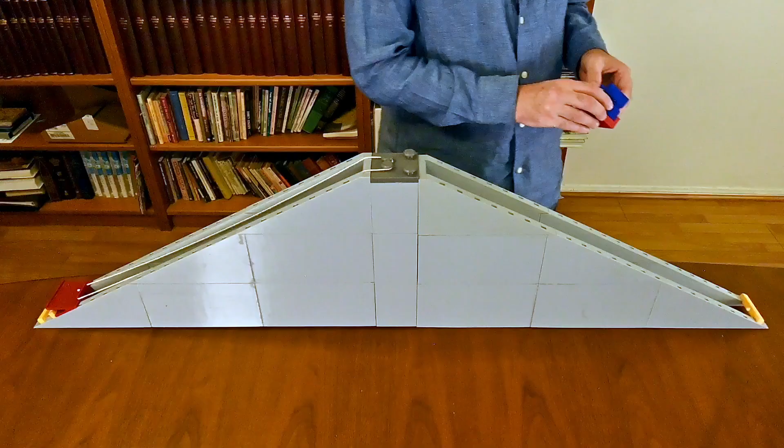This system would be in the Grand Gallery. It would slide up on the lowest part of the floor of the Grand Gallery. It would be hoisted up using manpower to lift it, and then you would have your regular size block to lift up to be placed in the pyramid.

Whether you consider the smaller granite blocks or the even smaller limestone blocks, this system would be lifted up and pulled down to lift this system, offload the system. They would lift the system back up, onload another one, and do it again.

Now, when you wanted to put extra weight on, say the 80-ton block, the huge block, you have a massive amount of weight to lift this time. This ain't gonna cut it. It's not enough counterweight, it's not gonna do it.

But if you add another counterweight, because there were three granite blocks found as plugging stones, you could lift that up, hook a loop, a pre-made loop that would tie these two together, and then you could do it again, and you could get three granite blocks. There may have been more blocks that were plugging stones made of limestone that were just broken apart and taken out of the ascending passage. If you guys know what I'm talking about, great.

But the thing is, if this was a reasonable size weight a group of humans could lift, you could keep pulling up blocks and attaching them to each other so they could do the lifting for one giant block. Then when you offload this block and need to reset it all, you would just untie these blocks. You would not have to offload the weight.

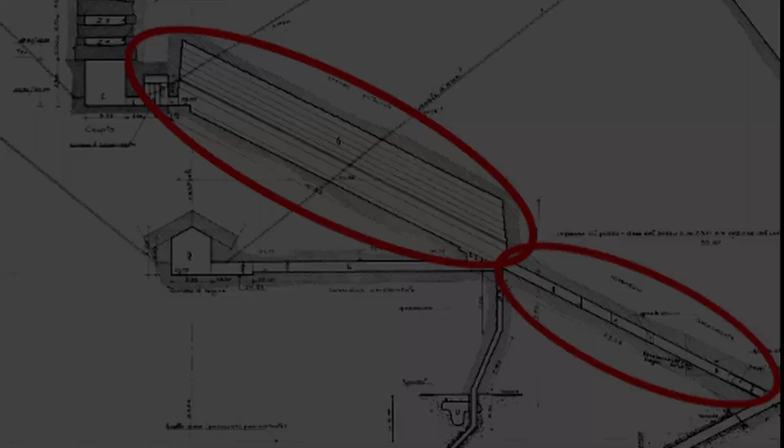And that's where a lot of men were probably standing with ropes, helping to pull and actuate this whole system. And that water would be either absorbed, or wasted, or whatever.

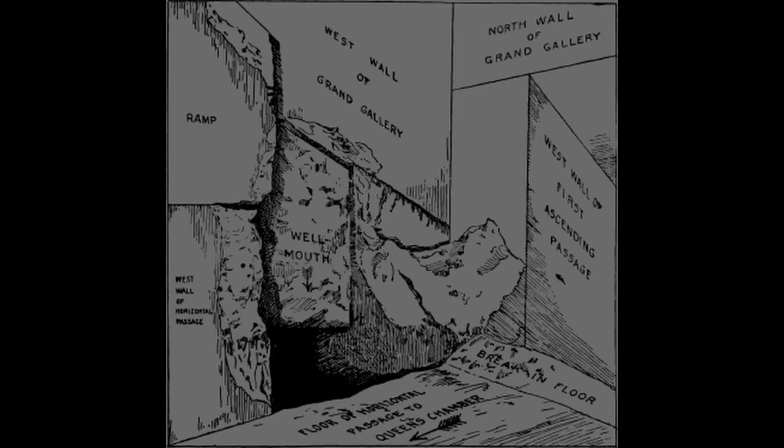But we know that right here at the very bottom of the Grand Gallery, there's what they call the well shaft that leads down to the grotto. History shows that when people rediscovered the pyramids and threw a rock down the well shaft, they heard a splash of water.

So this would be an area where the lubricating fluid could flow and keep the entire floor of the Grand Gallery lubricated, but they could recycle the water that went down the shaft and didn't keep going out of the Grand Gallery and out of the main entrance.

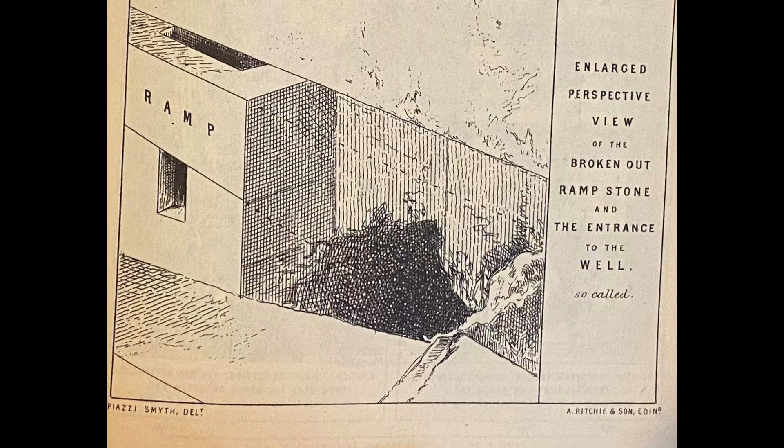There was even a lip on the edge of the bottom of the Grand Gallery that shows it probably directed the liquid into the well shaft, and that well shaft could be used to recycle if they sent buckets down, to bring that fluid back to the top. Okay, so that's basically another theory that I have about it.

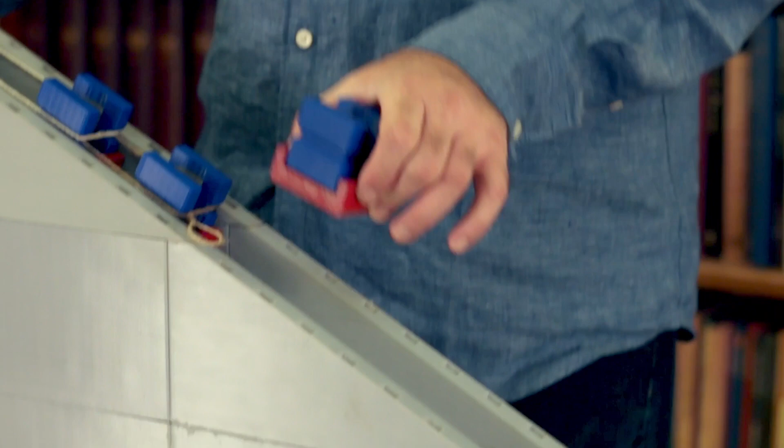The other thing I know is that this is a magic angle, 26.5 degrees. It's just the sweet spot between being easy to slip down and get started moving, and being so vertical that you can't stop it from moving. It always wants to slide. And it's not such a vertical angle that it would be hard for humans to lift it. They wouldn't have to lift it vertically.

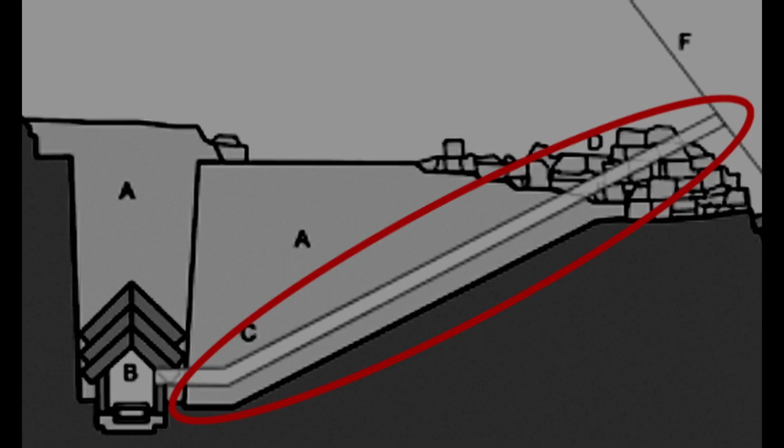The reason I bring that up is that this angle isn't just used for the Grand Gallery. With the exception of just a few, almost all the large pyramids had this exact angle, but we didn't find Grand Galleries with this exact angle going to their subterranean burial chambers. That subterranean burial chamber probably doubled as its own sliding counterweight system for building the pyramid on top of it, because it was at the exact same angle.

Another interesting thing was that when they got to the bottom of these descending passages in the pyramids, it got wide, which would be a perfect area to pull the blocks in and push them aside if you were trying to move stuff in and out of the pyramid, fix something, or anything, because these blocks were the width of the tunnel, so it wasn't easy to work around them. But all of the major pyramids have an area where the block could either be pushed aside or it got wider on both sides, and then a person could walk around and hook up these, connect weights, remove things, and do stuff like that.

So I believe that was the system. And then when they built some of the pyramid above them, they would build another counterweight system, and then they would have a series of blocks.

In addition to this, we also know that there is the great, I believe it's the Big Void. It's a large area that they think may have been a second Grand Gallery, one that was at a better angle and altitude to lift the final stones on top of the relieving chambers in the Great Pyramid.

But in any case, I believe that these systems were repeated, that there wasn't just one of these. This one was a special one for the Grand Galleries, but a similar system was used to build all the pyramids, and they could use this system to actually build on top of itself.

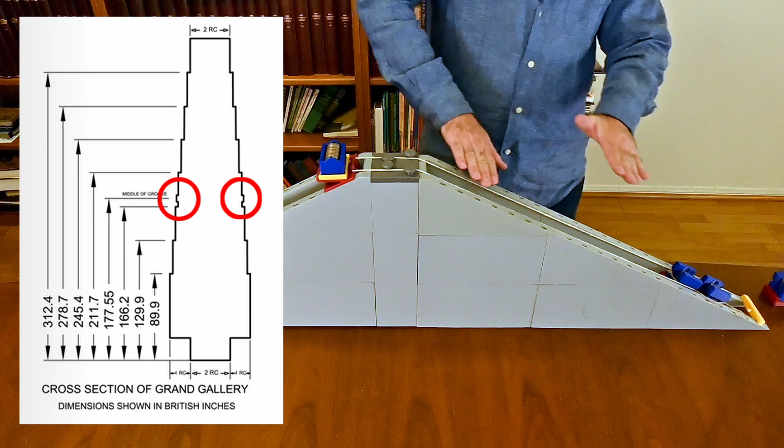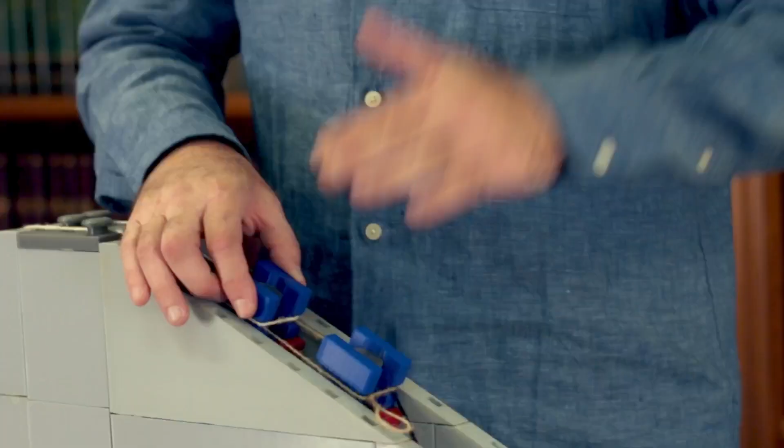They know that there are slots in the walls of the Grand Gallery that run parallel to this angle at a distance. What I believe is those slots were so that they could slide wood in, creating a catwalk for workers to attach loops of rope connecting one counterweight to another. The Grand Gallery is very tall, so that would be too far away for them to easily attach the loops of rope that connected one counterweight block to another.

So just like they found in the air shafts, they found copper hooks that they believed had long wooden handles, enabling somebody to reach down through openings in the catwalk to use them to angle these loops of rope so the two things could be connected. I believe that explains the notches in the walls of the Grand Gallery, only a portion of the height, allowing people to stand clear of the counterweights they were connecting and operating.

One other point I'd like to make is that Houdin believed this whole system was only used to build the king and queen's chambers, and the rest of the pyramid was built using spiral ramps. He has a spiral ramp theory, and I believe that theory was used because no one believed they could lift blocks at such a high angle—they would have to lift it at like 7 degrees or so.

But if you had a counterweight system, you could divide the weight into small chunks and use that whole system to lift something at a much higher angle. So his theory had a ramp running almost to the outer perimeter of the pyramid, but that was an internal ramp with internal tunnels and other stuff.